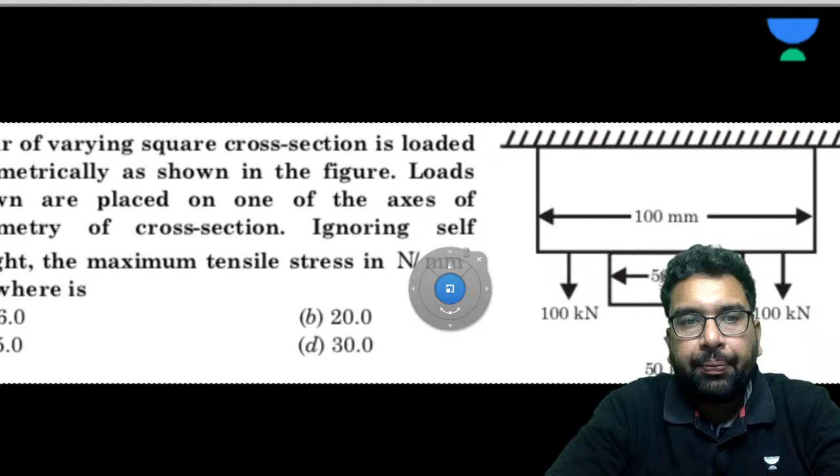In this session, we are going to deal with some physics problems and see if we are able to solve them. Let's start with some questions. Here we go with the first question of today. Come, let's do it, I'm very sure we can do it. Please try to solve this question.

Let's try to solve the question, my dear. All the live students, please try solving this question.

So this is a question from the properties of solids. I hope we can solve this question, we have seen the concept of it.

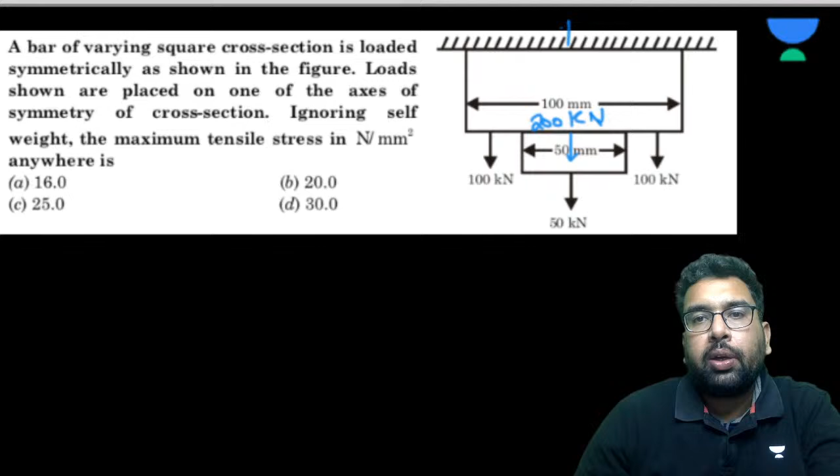Let me do this question first of all. So we are having a load of 50 here. This is 100, this is 100. So this will make two moments, but that will be an opposite moment, so the net effect of it will be 200 kilonewton here. Now if this is 200, this is 250, so this is going to be 250 kilonewton, right? This is going to be also, the reaction is going to be 250 kilonewton. So what will be the stress in the first part of this body? Let's name it 1.

Okay, you are preparing for 2025, so you have enough time. But sometimes when we have much time in hand, we feel that okay, we can delay the topic. It is not the way to delay the topic. On the channel, if you follow the videos, I have already done motion in a straight line, units and measurement, motion in a plane, vectors, properties of solid. You can go through them if you want.

So sigma 1 is going to be 250 kilonewton, that is 250 into 10 to the power 3 divided by 100 square. So this is a square cross section, so it will be 100 square. So clearly it is 25 megapascal. And now in the second section, we have this is 50 into 10 to the power 3.

The next question I'm going to give you is from motion, kinematics only, don't worry. NLM you have done, Abhishek, Newton's law of motion. Forces you have done, are you able to sort out with forces, friction and all?

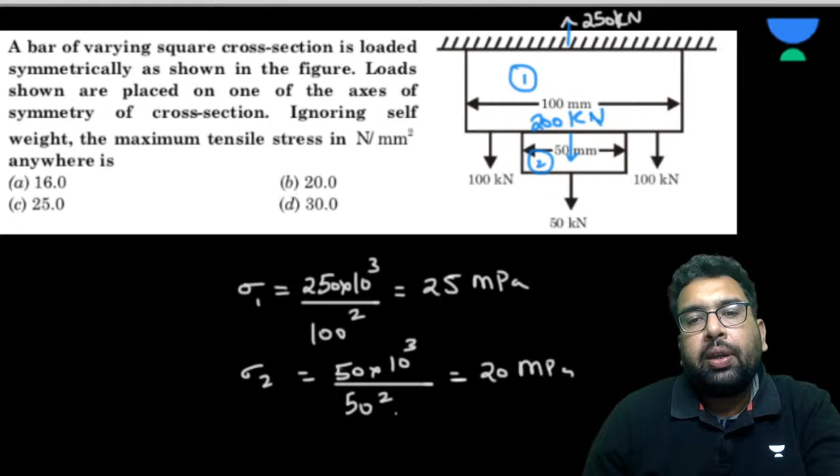So it is 50 square, so this is going to become 20 megapascal, isn't it? 50 square, 50, 50. So it is going to be 20 megapascal.

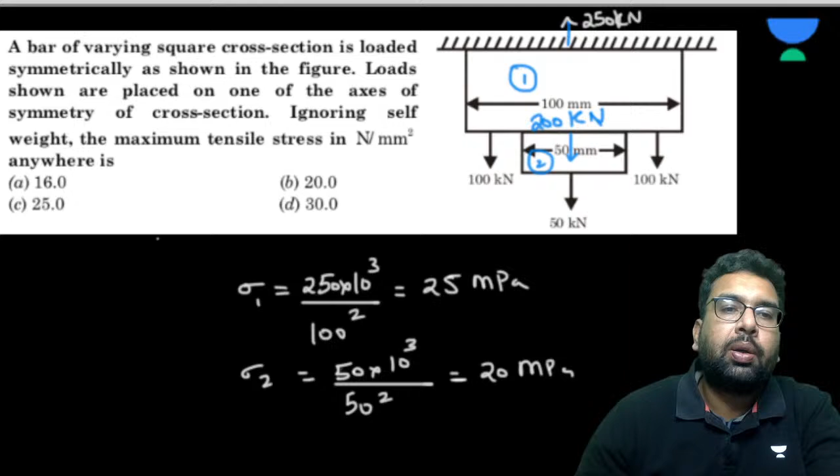And units and measurement, have you done that? Okay, wonderful.

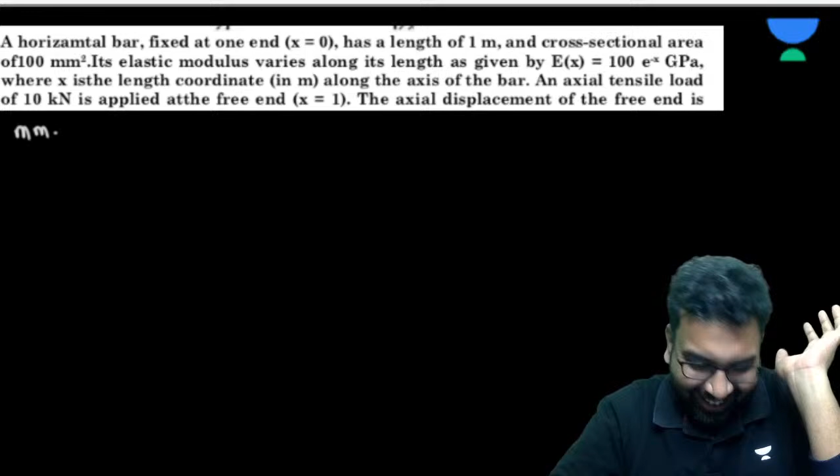Don't say it yet, it is very disheartening to me. I have been studying physics and still studying it, so it's very close to my heart.

Don't say, anyway, now come. I'll give you the concept. See, when you look at the chapter...

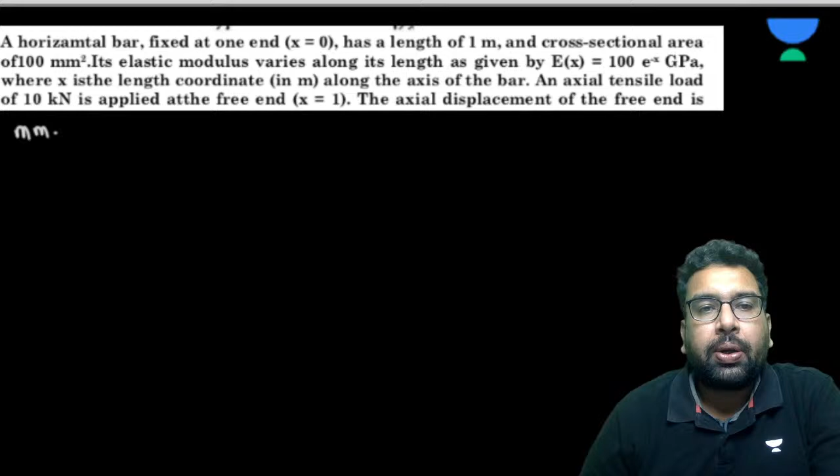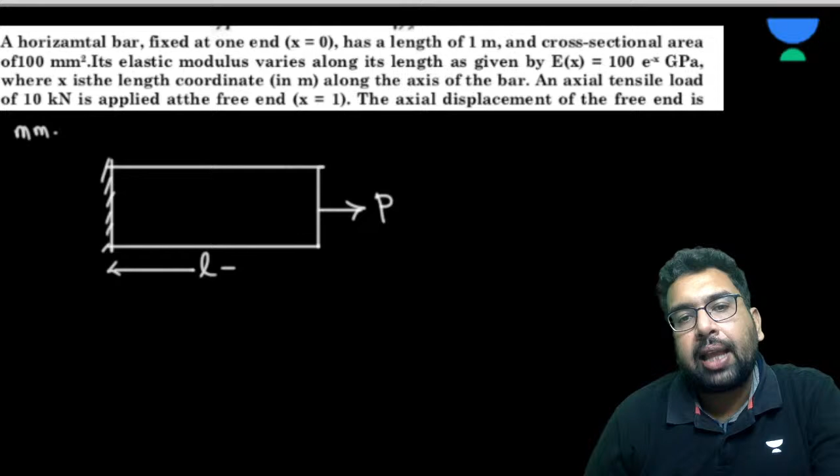50% of this chapter explains the use of Hooke's law, isn't it? Harsha, you might have done this chapter already, so I hope you can relate with me. So if the load is P, length is L, area of the cross-section of the component is A, and Young's modulus is E, Hooke's law gives you the formula for elongation, and that is PL upon AE.

This is the one and only formula to find the elongation of a bar subjected to a load like this. There is no other formula, right? Here P is the force, L is the length of the component, A is the area, and E is the modulus of elasticity, that is the Young's modulus, okay?

And I'll give you just one more hint to solve this question. This is relatively, Harsha, in physics you must enhance your concepts. This is not just about this question, the concept you get from here will help you solve many other questions. Are you getting my point?

Now see, Harsha, please tell me, have you seen this formula or not? PL upon AE from Hooke's law. Instead of P, you might have been using W or F, but it's the same formula. For E, sometimes people use the sign Y, I use E. Have you seen this formula? What about the other live students?

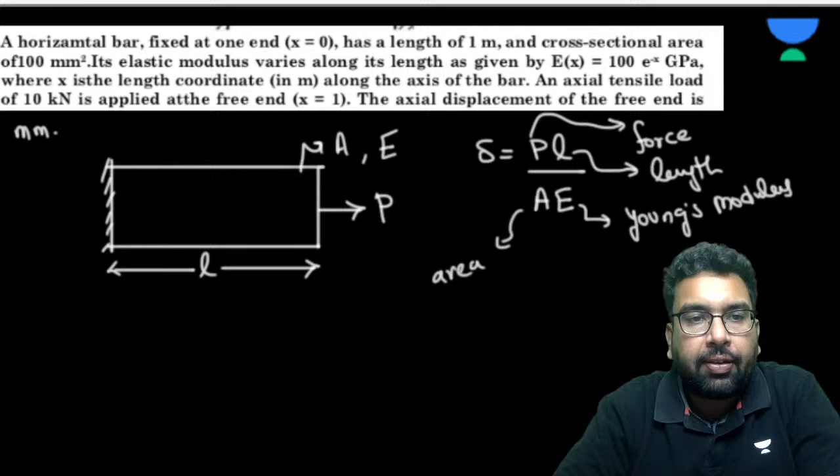No, no, no, it's not like that, Dave. Don't think that way. Okay? Don't think like that, beta.

See, physics is all about question solving. The more you solve, the better you will get. And I tell you one thing, Dave, I honestly tell you, I don't claim to be anything great. If physics is this much, I know just very little of it. Are you getting my point?

No one should claim to be the god of physics. I live in IIT Roorkee, I live with the professors here, so I know this is not the kind of subject where anyone can claim that when a question comes, he or she will be able to apply the right concept at that very moment. There is no guarantee to it.

This is not biology, Harsh sir will beat me when I say this. This is not biology. Biology is what? I never went through biology much, but I believe if you have done proper memorization of something, a question comes and you'll be able to answer. There's no loophole in that.

In physics, it's this kind of subject, you know the formula, you know the units, you know everything, but after that, whether you're able to solve it or not is always a question. This is how physics works, so don't think that way.

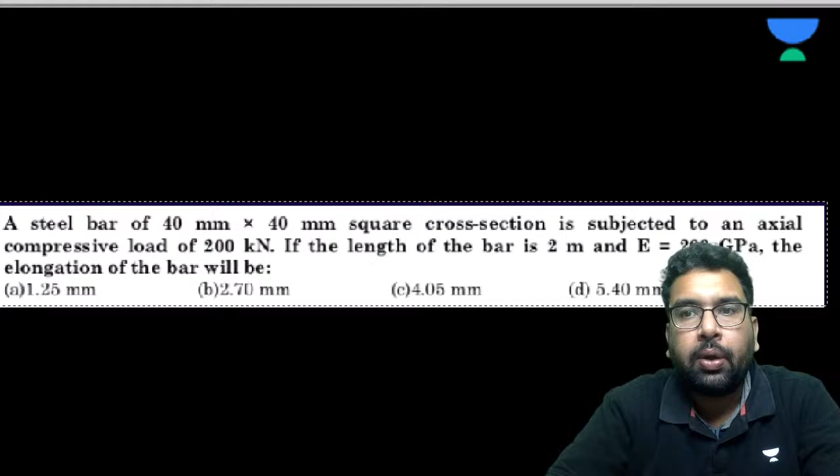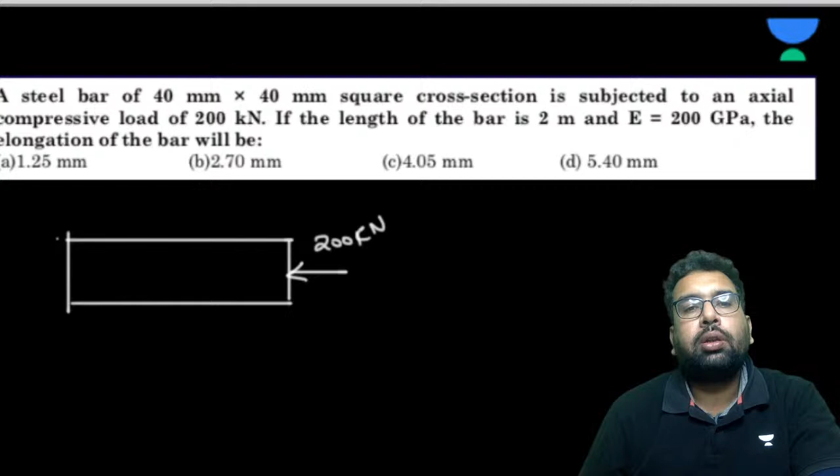A steel bar of 40 by 40 cross section is subjected to an axial compressive load of 200 kilonewton, acting towards the surface. If the length of the bar is 2 meters, Young's modulus is 200 GPa, find the elongation. I have only one formula in the world to solve this question, that is PL upon AE.

It's easy when you have a good capacity of memorization, right? I am very bad at memorizing things, so it's difficult for me. It depends upon whatever you have read. So see how I'm doing it.

I'm just putting everything in the formula: P is equal to 200 into 10 to the power 3, into L. L is 2 meters, so it becomes 2000 upon area. Area is 40 cross 40, into E. E is 200 GPa, that is 200 into 10 to the power 3. So the zeros cancel out, and we get 20 by 16, that is 1.25 mm.

So, very easy question, isn't it? Just give me a yes or no. I hope you must also have got how to use this formula.

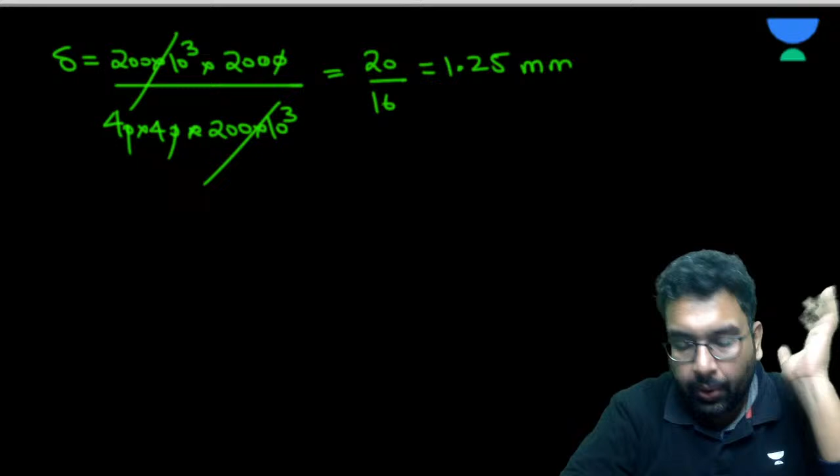I was able to use the formula directly because everything was constant: Young's modulus was constant, load was constant, length was constant, area was constant, so I used it directly. Now give me a yes or no, do you have any issue with this question? Please answer me.

Yes or no, this question was easy now. Now we can try this question. You can apply this formula directly when everything is constant. Let's try this question, I'm sure if you try to do it, you will be able to.

Yeah Dave, it happens that way, right? It happens that way only.

In physics, let me tell you how I approach a question. First, I identify the topic of the question, like okay, this question belongs to this particular chapter. This is always my first step. It might sound lame that right away we can judge which topic a question belongs to, but sometimes in physics people mess this up too. After I understand which topic the question is from, I start thinking of the formulas used in that chapter. Then, from the data given in the question, I try to apply those formulas to the given information. This is how I approach physics, and I have seen that it works for me.

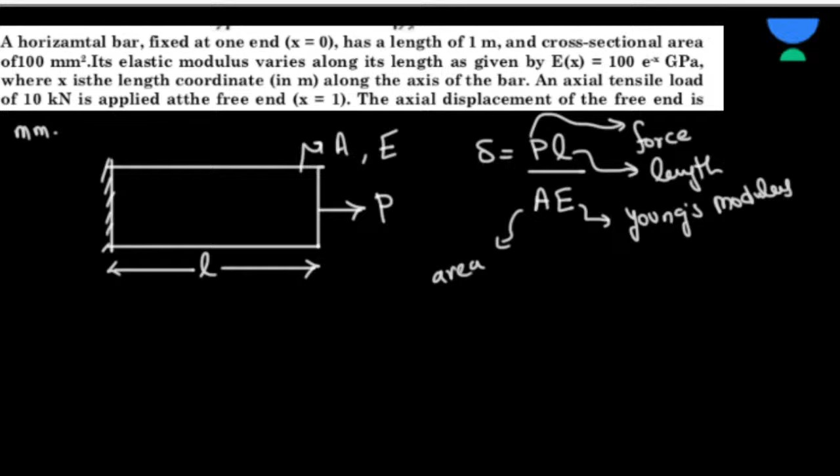Please try. Let's try. We are in no hurry, you take your time. Ah, no problem there.

No, no, no, so Harsha, see my dear, this is the formula for this question: PL upon AE. Okay, PL upon AE, this is the formula.

So why have I solved this question? Did you understand it? Tell me please. Only using the formulas. P is the force, not pressure, P is the force. Let me explain it again. Dev, Harshad, did you understand this question when I did it? Please answer me.

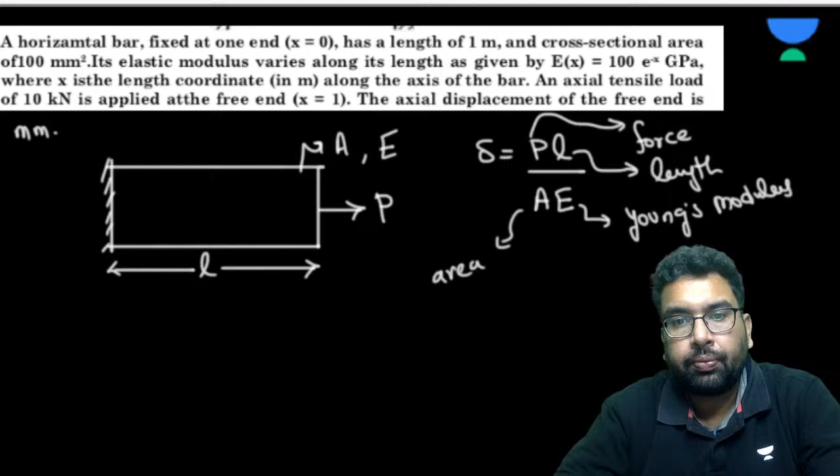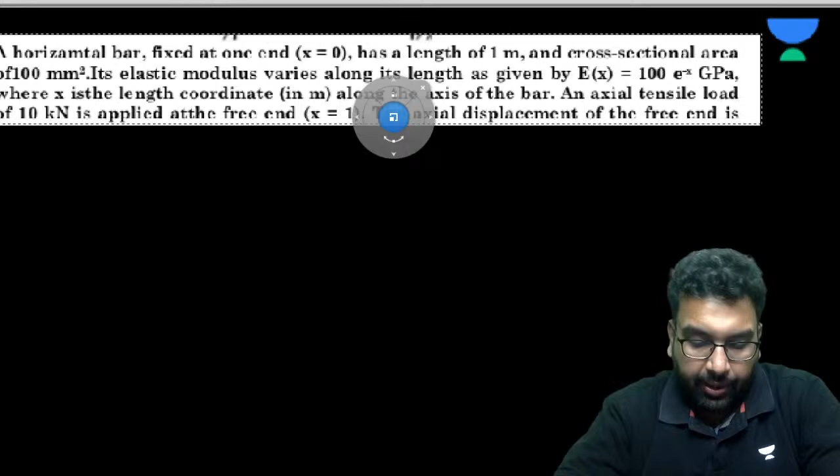Any other live student who wants to attempt this question, or shall I do it? Okay, now let me do it. See, come, I'll do it. No, that is not the answer.

I just wanted to tell you the approach and how you can attempt questions which are a little twisted. Okay? No, no, it's nothing to be sorry about.

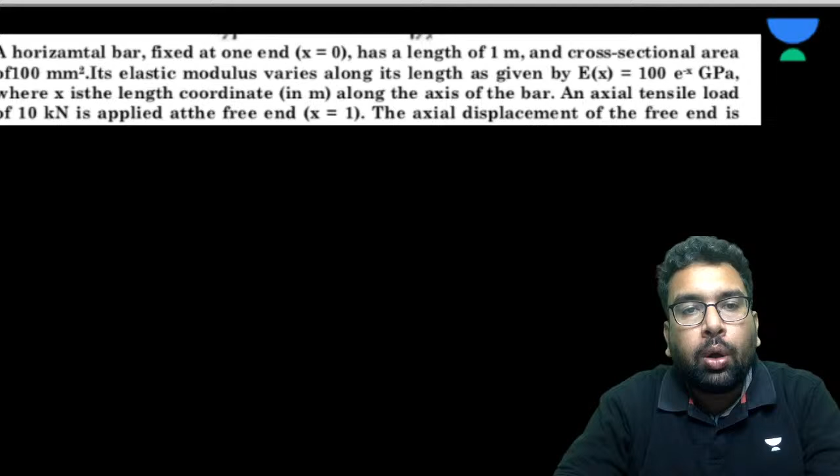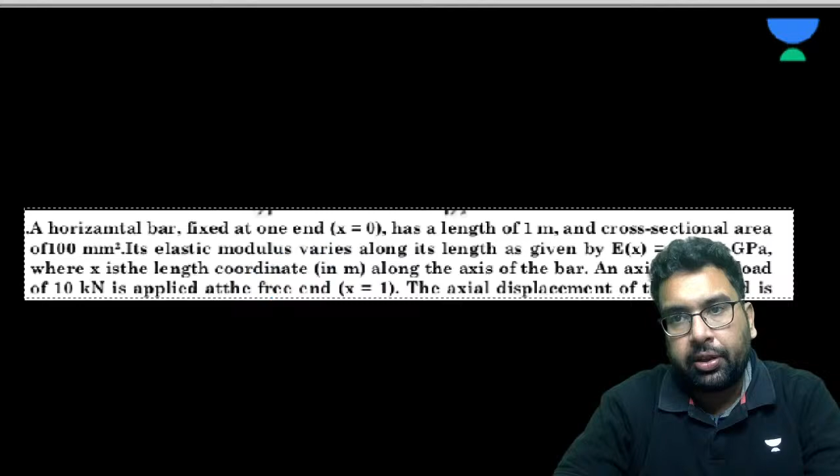Right now, what approach I am trying to follow in these sessions is that I try to come up with a little difficult question, which may help you understand some concept of physics in a better way. This is how I believe physics must be learned. Are you getting my point, Anshika?

Okay, so this question is a little different from how you see a general question of physics. Because to enhance question-solving ability, it is very necessary that we attempt some good questions. What I believe is, to understand physics properly, it is very important that you understand some concepts pretty well. You must develop an approach of solving questions. These questions are of such kind - like this question, this is a very good question. Now let me solve it, right?

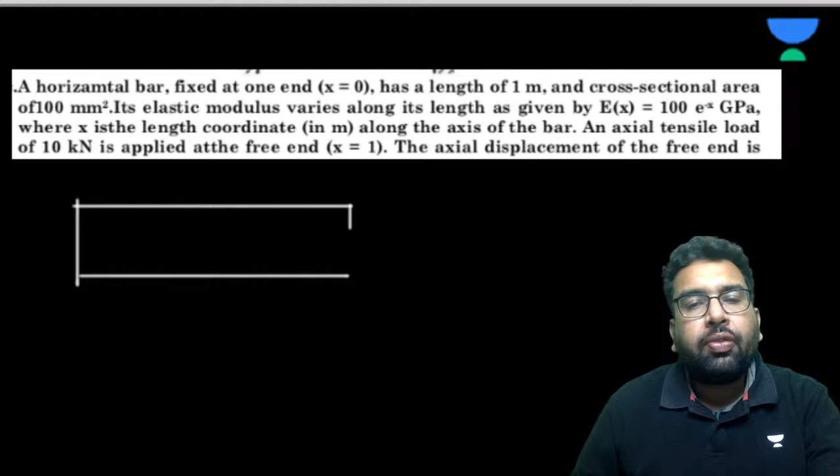So it says a horizontal bar fixed at one end. Let's make a horizontal bar - so this is a horizontal bar. In physics, it is very important that you draw some sort of figure; it helps you understand the question well. So it is fixed at one end. The length is 1 meter, right? And the cross-sectional area is 100 mm square.

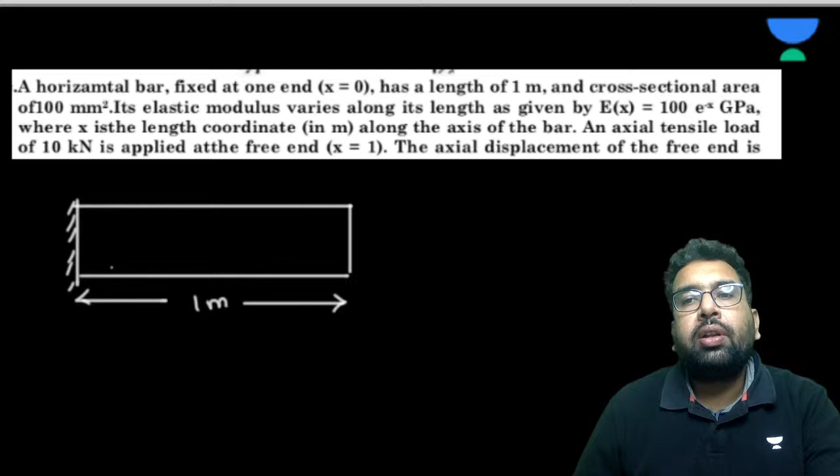The elastic modulus varies along its length as given - so Young's modulus is given as a function of x. That means in this question, the Young's modulus is not constant but varies with respect to x. An axial tensile load of 10 kilonewton is applied. The axial displacement of the free end is - so we need to find the delta.

Now I tell you guys, we must have seen only one formula for finding the deflection of a body or component subjected to tensile load. And what is that formula? This is FL upon AE - force into length upon area into Young's modulus. Now in this question, what is different? What is the difference from the other question? The difference is, in this question, the Young's modulus is not constant, but it is varying.

While reading this chapter, or whenever you read it, you'll find you're already familiar with something similar. For example, all of you, while going through this chapter, did the self-weight case - I hope if you've learned this chapter you can relate with me. In the self-weight case, the load is varying due to the self-weight. In this case, the load is not varying, but the Young's modulus is varying.

Now have my tip: whenever in physics you find something in variation, right away take the strip. Whatever is varying - along some length or area or anything - whenever something is in variation, you always prepare yourself for integration. For that you must take the strip. Now we are taking a strip here - a strip of very small length, let's say this is dx. Now see, once you take the strip - in physics we have limited formulas. The only challenge is how we are going to apply that particular formula to a given problem.

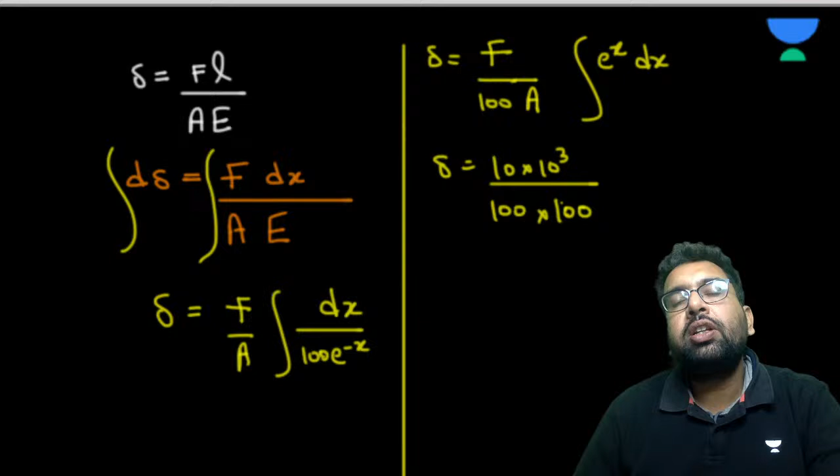Now please take care of the units, because we are going to put the length in meters, so I must change this mm square into meters. So mm square means 10 to the power minus 6, 10 to the power minus 6.

And what is the integration of e to the power x? It is e to the power x only. And what shall be the limits? x varies from 0 to 1, so can I integrate between 0 to 1? Yes, right away. So if we integrate this between 0 to 1, I can write like this.

So this will become delta. Now we can do some cancellation. 10 to the power 4, 10 to the power 4 is gone, and it becomes e to the power 1 minus e to the power 0.

Now, what is the unit of this E? It is GPa, so I need to multiply 10 to the power 9 also into this, because it is in GPa. So I have converted the force in Newton, which is 10 into 10 to the power 3. We have placed this 100, so this will be 10 to the power 9.

So now what are we getting? 10 to the power 3. Okay, 10 to the power 3 we will be getting, so 10 to the power minus 9 it will become. How come? Because we have to place it here now, since E's unit must always be taken care of. This will become 10 to the power 9 here, so it will go as 10 to the power minus 9. So from here we are getting 10 to the power minus 3.

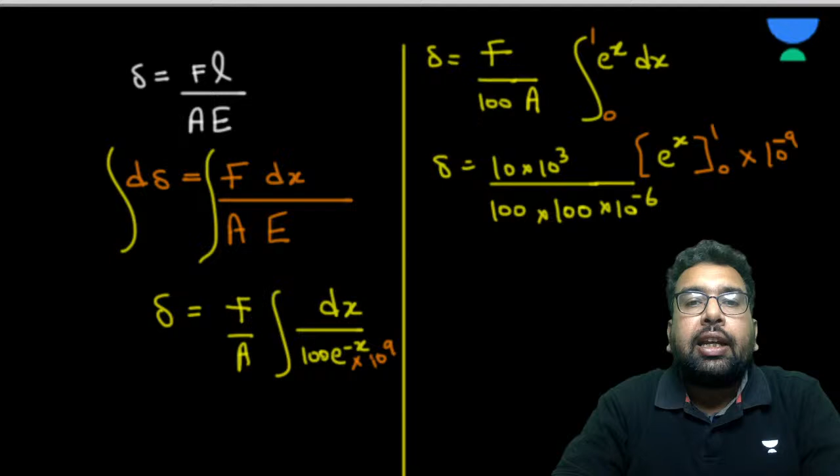So the key point is, whenever you see something is varying, be it E, we do the same way. We have done the same way in the case of the self weight case also, where the load was variable. In this case, the Young's modulus is variable.

Anything that is varying - if you go to my videos on this channel, I have solved for self weight, I have given you the tapered bar also, and now this question also in which the Young's modulus is varying.

Remember this point of physics: whenever you see something in variation, you always take the strip and prepare for integration. You take the strip, write the formula you know on it, then integrate that formula between the limits you are having, and definitely you are going to approach the right answer. This is how we can solve this very good question.

When you solve these kinds of good questions, it is definitely going to help you enhance your concepts of physics and give you confidence also. I hope you have enjoyed solving this question. What do you say? Have you or haven't you? Yes or no?

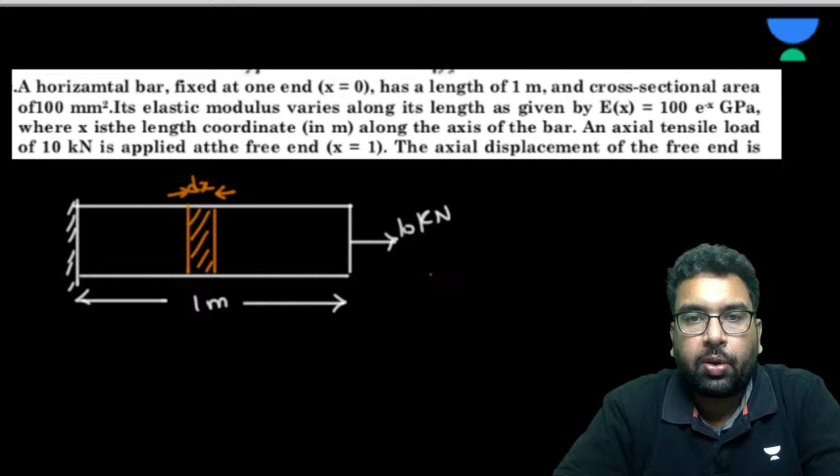Okay. Harsha, so you are saying this one?

Okay, no worries. So let's start with this question. I'll just tell you some information.

Now you must try to attempt this question with full of your heart. When you try it, definitely you will be able to do it. You must try very hard, you must try with honesty.

Okay, now I'll tell you the Bernoulli equation. So how do you apply the Bernoulli equation? See, the Bernoulli equation basically is the statement of energy.

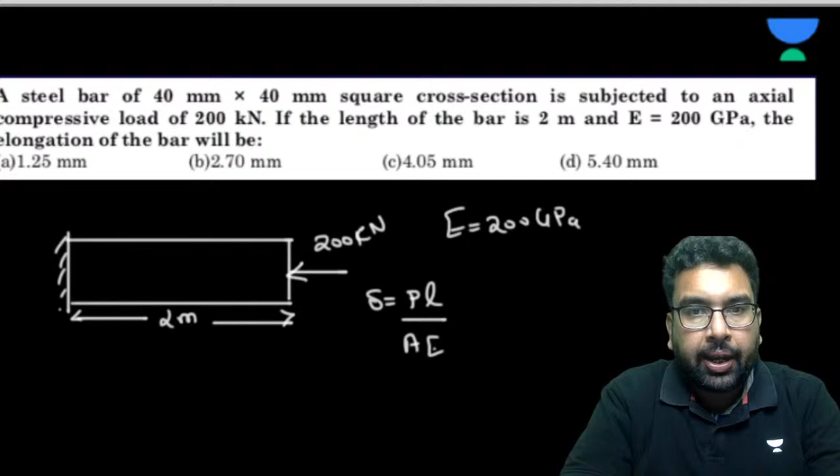So you must know the first law of thermodynamics. Na kya leke aaye the kya leke jaoge, isn't it? Yeah, that question first option - this is what we have solved already, 1.25. Yeah, good. So this is the statement of energy only.

How do I say it - kya leke aaye the aur kya leke jaoge. Energy cannot be created, cannot be destroyed, but can be transformed from one form to another form. Although this is not exactly the first law, it's a consequence of the first law.

The first law says for a closed system undergoing a cycle, the net heat interaction is equal to the net work interaction. This is the first law of thermodynamics.

The second law of thermodynamics comes with two statements - one is Kelvin Planck, one is Clausius. What is the Kelvin Planck statement? It is impossible to construct a device working in a cycle

which can be 100% efficient. Or the right way how Kelvin said it: it is impossible to construct a device working in a cycle which can interact with a single temperature reservoir and produce work.

Clausius' statement says it is impossible to produce a device working in a cycle which can transfer energy from the low temperature reservoir to the high temperature reservoir without any external aid.

And what is the third law of thermodynamics? Anyone? Any live student? First of all, is there even a third law of thermodynamics? Just out of curiosity, let's see how students are learning these days. What is the third law of thermodynamics? Any idea, anyone?

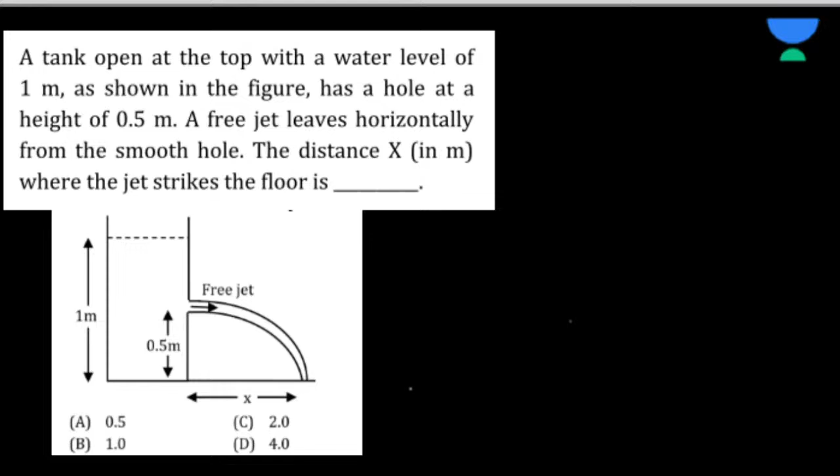Oh, so due to some reason, I have been speaking for a while and my video audio was not working. Oh my goodness. So all of you must have attempted while I was speaking this much. So this is how it happens when you go online. I need to learn from you guys how to do all this online stuff. Okay, so I'll continue.

So the answer, I suppose, is 1 meter. Very good, Harshu, wonderful. Now see what you have to do. This is basically if you think about it. Now let me do this question.

Now let us do this question using the concept we have learned, and see this is a multiple concept question. It says a tank open at the top with a water level of 1 meter, as shown in the figure. It has a hole at a height of 0.5 meter. A free jet leaves horizontally from the smooth hole, and the distance x where the jet strikes the floor is what we need to find.

Now see, this is looking somewhat like a projectile motion, isn't it? The projectile motion from the height of a tower. So when the jet is coming out, let's suppose it's coming out at a velocity of u, and we need to find this x. So how can we approach this question? We have to find x, so again I have to use the equation of motion: s is equal to ut plus half at square. This is our equation of motion that we very well know.

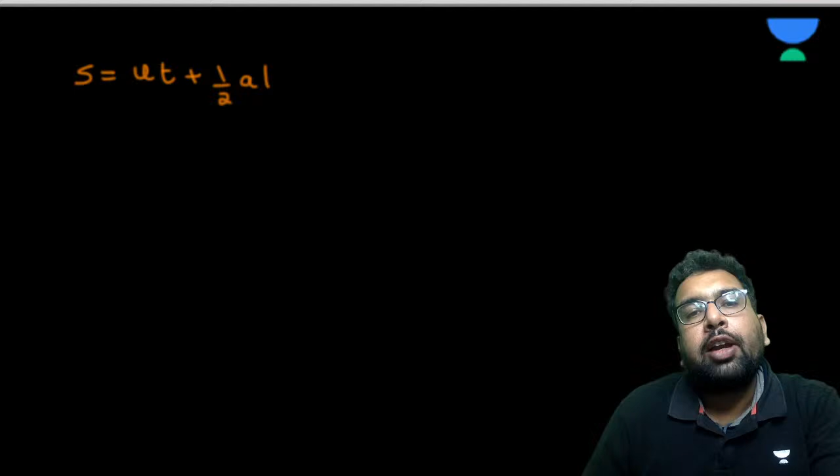Now see, this jet when it is moving, it is moving in the x direction also, and it is moving in the y direction also. So it is basically looking like the motion in a plane, and it is exactly the same as we do the projectile motion from some height.

So now if I use this equation in the x direction, let us suppose this is point 1 and this is point 2. I am applying this motion equation from point 1 to point 2 in the x direction. So what will be the displacement in x direction between point 1 and 2? This is x only, the x distance asked in the question, and ut, where u is the velocity at point 1 in x direction.

And what is the acceleration in x direction, guys? It is 0, because it is falling under gravity, and acceleration due to gravity always acts in the downward direction. It doesn't act in the x direction. So x is equal to ut plus half at square, and here the acceleration in x direction is 0.

So now please tell me, if we have u and if we have the time, will we be able to solve this question? Definitely yes. If we have the velocity at point 1 and the time in which this stream reaches from point 1 to point 2, we'll be able to solve this question.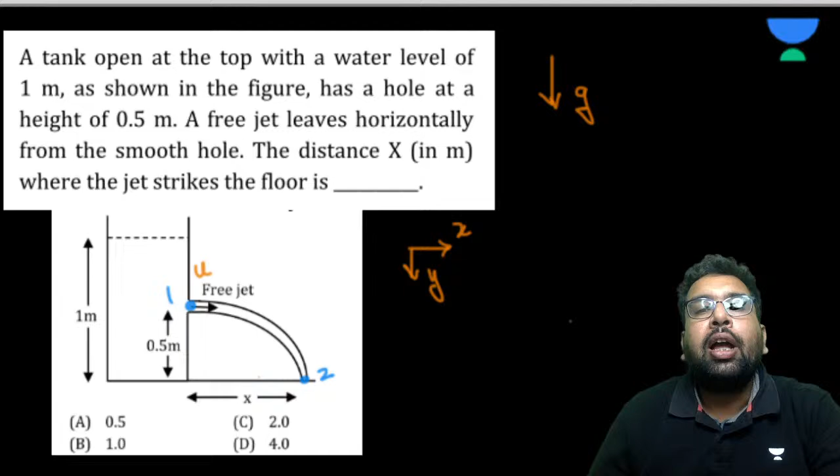Now between point 1 and 2, if I apply the same equation in the y direction - when this stream is coming out from here, it is having velocity like this, so its initial velocity in y direction at this point is obviously 0. So in the y direction, s is equal to uy times t plus half ay t square.

Now what is this sy? It is minus 0.5, following the sign convention: from the reference point, if any vector is in the downward direction, we take it as negative. So this sy becomes minus 0.5.

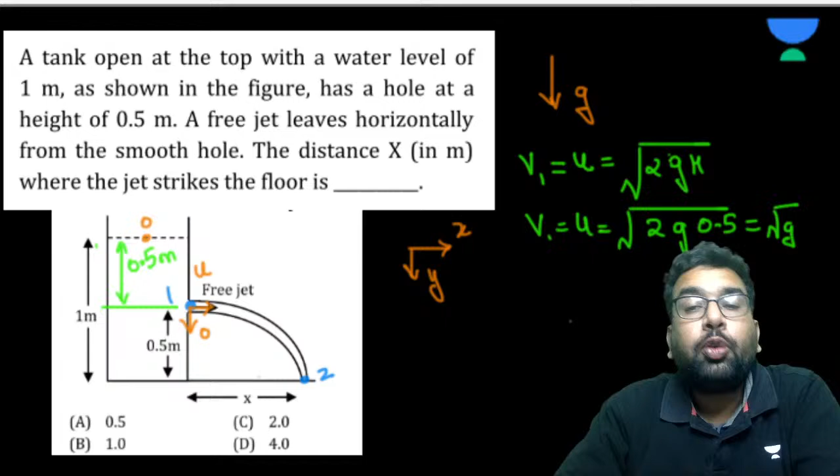Good question, isn't it? So when we do such kind of question, once you understand it, you must be feeling that it is not that difficult. The only matter is that you apply the right approach.